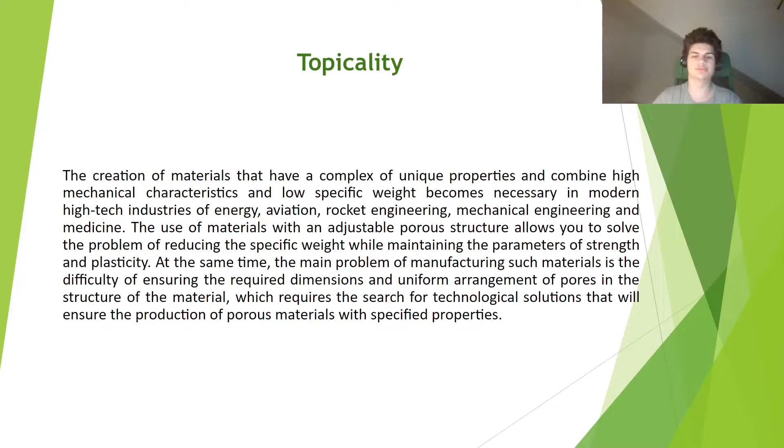At the same time, the main problem of manufacturing such materials is the difficulty of ensuring the required dimensions and uniform arrangement of pores in the structure of the material, which requires the search for technological solutions that will ensure the production of porous materials with specified properties.

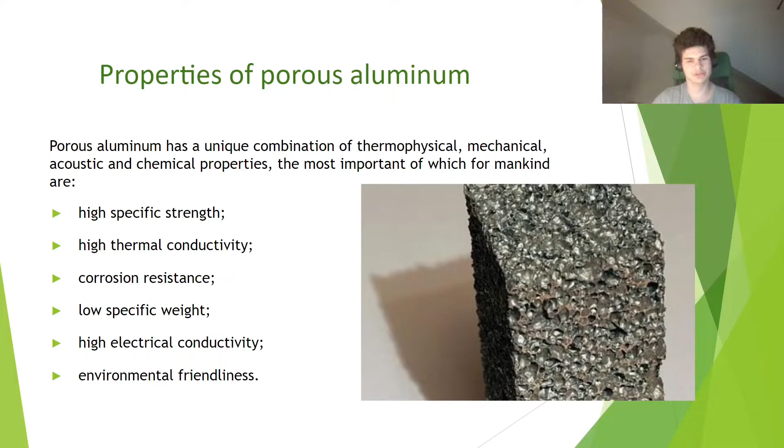Properties of porous aluminium. First, it's low specific weight and high specific strength. It's also corrosion resistance, high thermal conductivity, high electrical conductivity, and environmental friendliness. It's also filtration of gases and liquids, heat exchange, sound absorption, pneumatic transport, creation of energy-absorbing elements, and protection of sensors and gas analyzers from mechanical impact.

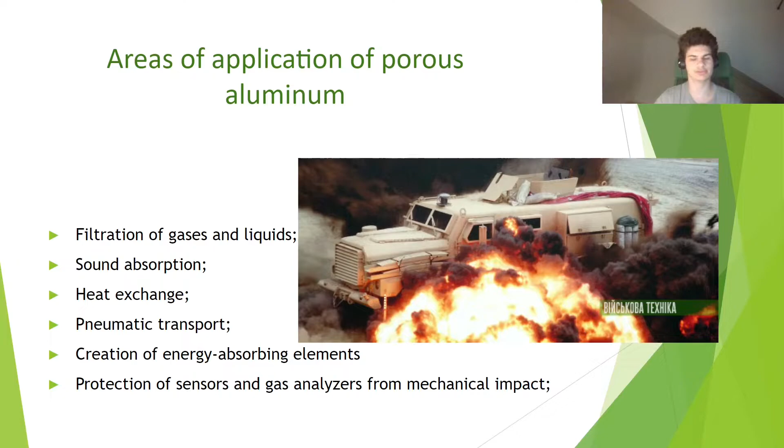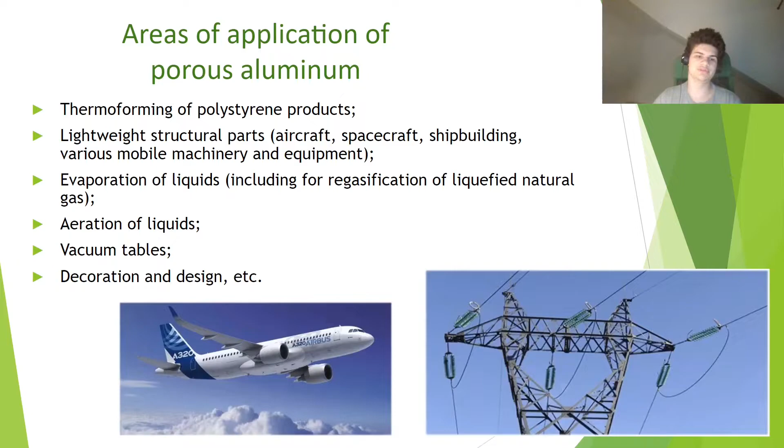Areas of application of porous aluminium. The main area of application of porous aluminium is lightweight structural parts. It's also thermoforming of polystyrene products, evaporation of liquids, aeration of liquids, vacuum tables, decoration, and design.

To obtain porous aluminium, modern production uses several different methods, but unfortunately each of them has some disadvantages: high energy consumption, complex equipment, or considerable financial costs. Therefore, in our opinion, a deeper study of the technological parameters of infiltration which affect the formation of the structure, porosity, and mechanical properties of porous aluminium is expedient.

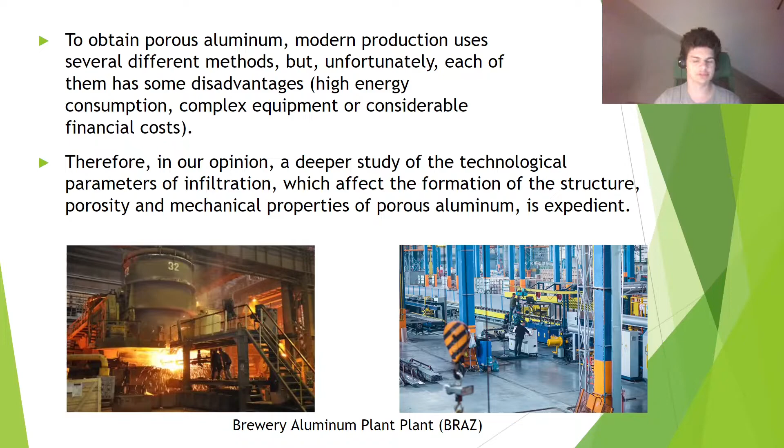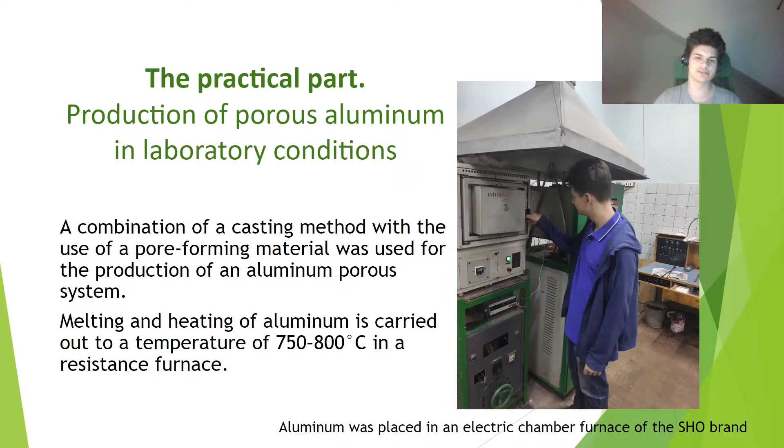The practical part. A combination of casting methods with the use of pore-forming materials was used for the production of an aluminium porous system. Melting and heating of aluminium is carried out to a temperature of 750 to 800 degrees Celsius in a resistance furnace. Sodium chloride as a foaming agent. This material was sodium chloride. For this, particle sizes from 0.6 to 1 millimeter were used.

From the point of view of physical properties, the melting temperature of sodium chloride, 801 degrees Celsius, is important for the production of porous material. Before pouring the aluminium melt into the preheated mold, salt was subjected to heat treatment to connect the gas cells in the porous material.

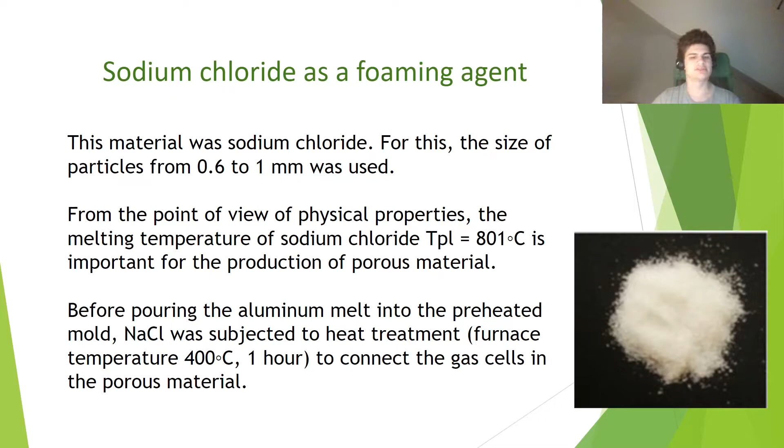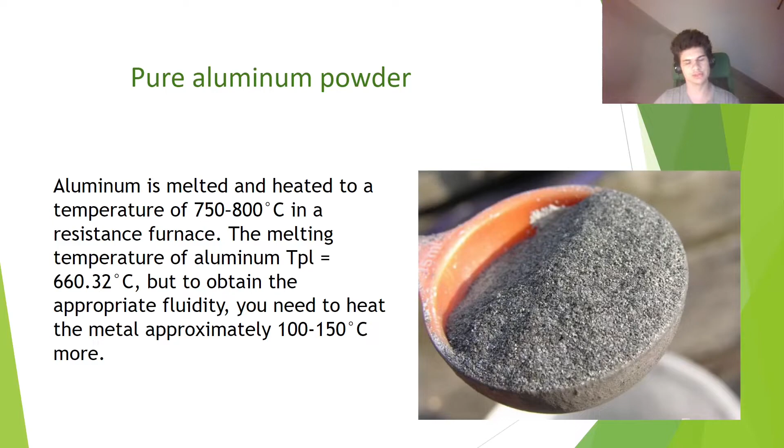Pure aluminium powder. Aluminium is melted and heated to a temperature of 750 to 800 degrees Celsius in a resistance furnace. The melting temperature of aluminium is 660.32 degrees Celsius. But to obtain the appropriate fluidity, you need to heat the metal approximately 100 or 150 degrees Celsius more.

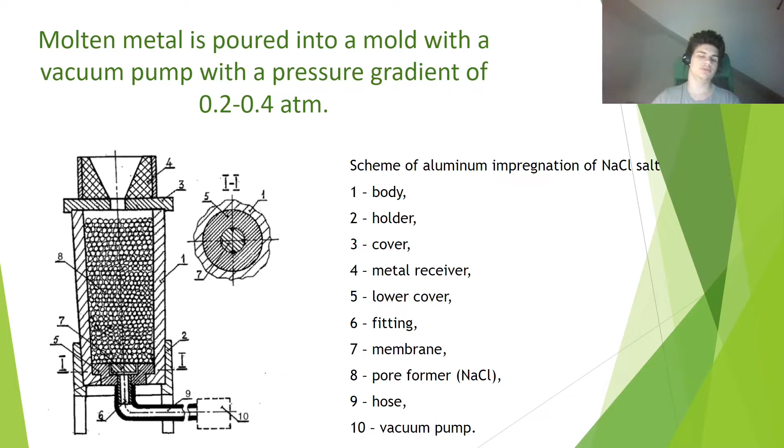So here's the scheme of aluminium impregnation of salt. You can see here the body, holder, fitting, lower cover, metal receiver, membrane, pore former, hose, and vacuum pump.

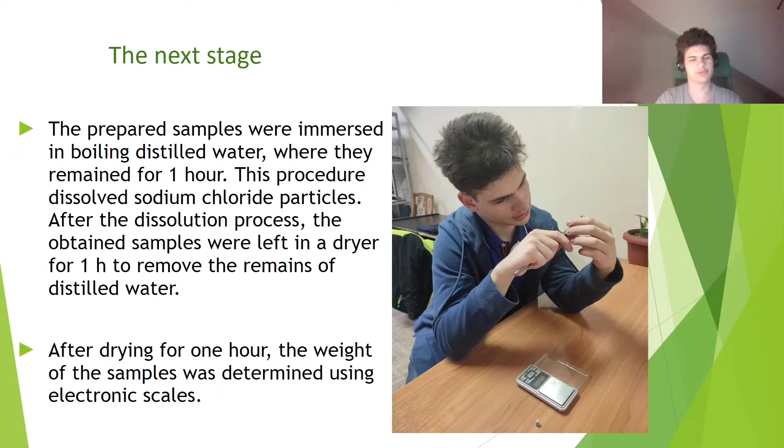The prepared samples were immersed in boiling distilled water, where they remained for 1 hour. This procedure dissolved the sodium chloride particles. After the dissolution process, the obtained samples were left in a dryer for 1 hour to remove the remains of distilled water.

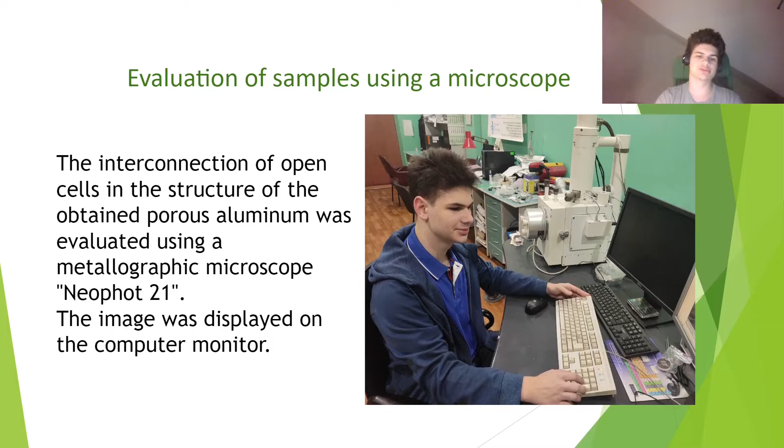The interconnection of open cells in the structure of the obtained porous aluminium was evaluated using a metallographic microscope Neophot 21. The image was displayed on the computer monitor. Here you can see our photos. On these photos you can see that we got an open pore structure.

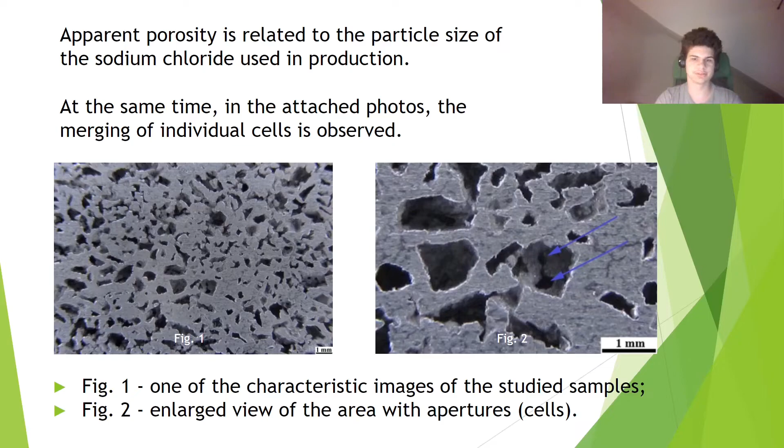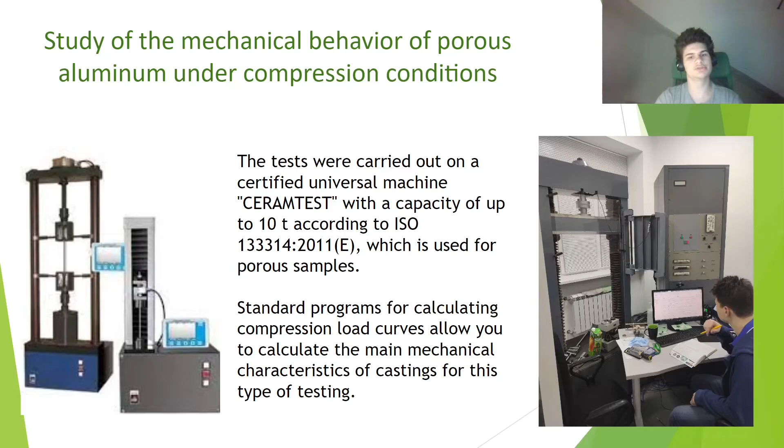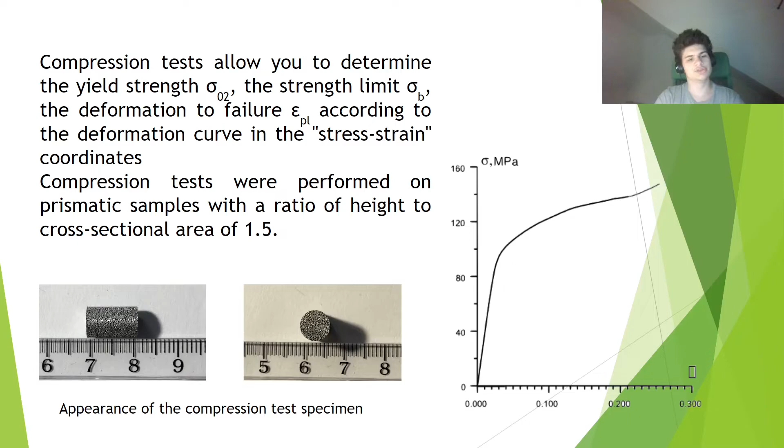Study of mechanical behavior of porous aluminium under compression conditions. The tests were carried out on a certified universal testing machine with a capacity of up to 10 tons according to ISO, which is used for porous samples. So here you can see the graph, and on this graph you can see the yield strength, the strength limit, and the deformation to failure. Compression tests were performed on prismatic samples with a ratio of height to cross-sectional area of 1.5.

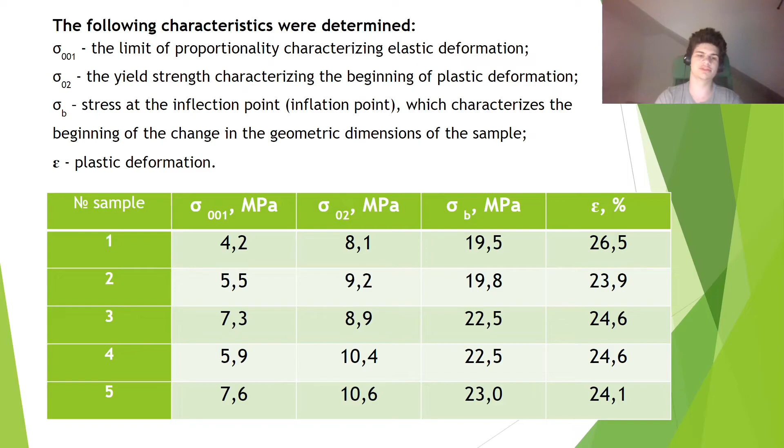So here's the table. Here we determined the characteristics of the limit of proportionality, the yield strength, stress at the inflection point, and plastic deformation for each of our samples.

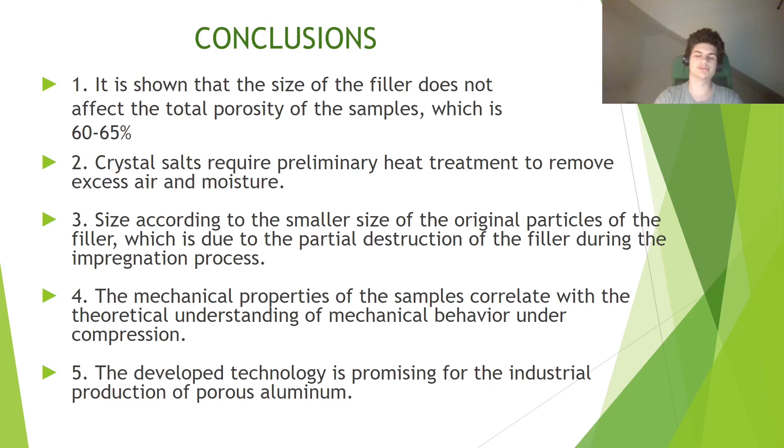So, conclusions. It's shown that the size of the filler doesn't affect the total porosity of samples, which is 60–65%. Crystal salts require preliminary heat treatment to remove excess air and moisture. Size according to the smaller size of the original particles of the filler, which is due to the partial destruction of the filler during the impregnation process. The mechanical properties of the samples correlate with the theoretical understanding of mechanical behavior under compression, and the developed technology is promising for the industrial production of porous aluminium.